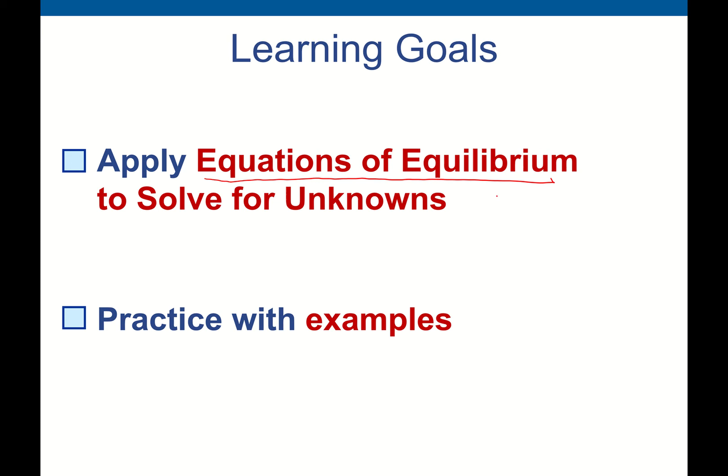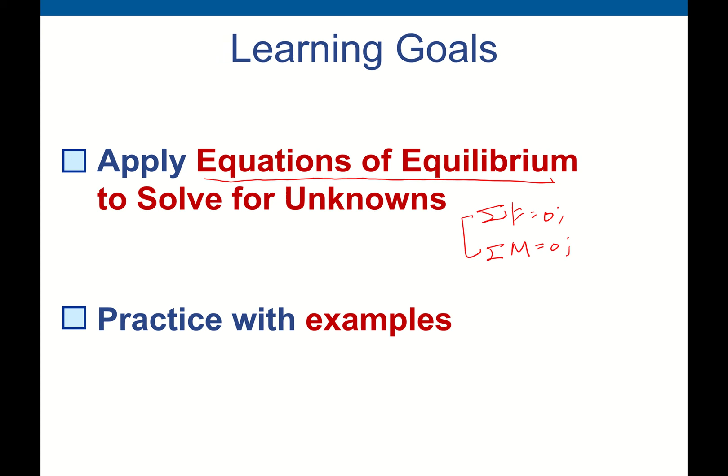So we have one learning goal today. Apply equations of equilibrium. So you may remember we learned this concept last class. Sigma F should be equal to 0. Sigma moment should be equal to 0. So these two things are the main equations we have to use.

In 2 dimensions, it's pretty easy, guys. Sigma Fx should be equal to 0. Sigma Fy should be equal to 0. That means there is no translation. This one means there is no rotation. So this is the rigid body. If this rigid body is stable, then these equations should be satisfied.

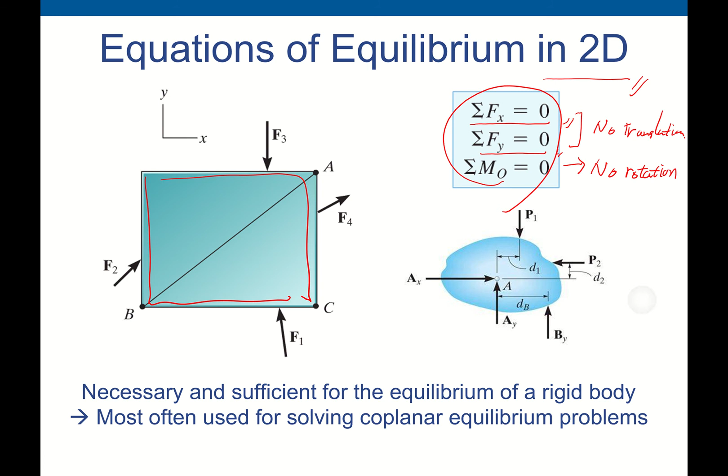Well, this is an interesting one. So if you look at this one, sigma Fx is equal to 0, and sigma moment A. Oh, okay. So we learned this one: horizontal forces should be equal to 0, the vertical forces should be equal to 0, and the moment at any point O should be equal to 0. How about these equations?

If the horizontal forces are all equal to 0, okay, no matter what the force Fy, if there are 2 points, point A and point B, if the moment at point A is equal to 0 and the moment at point B is equal to 0, then without satisfying the condition sigma Fy equal to 0, these three equations are good enough that the rigid body is stable.

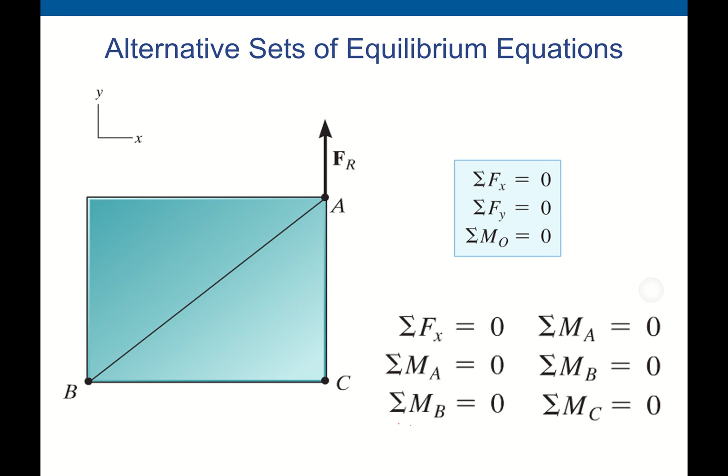When you solve the problem, please draw the free body diagrams. So there are several steps. The first step is to show the XY coordinate axes. You know this. So this is the positive x-axis direction and this is the positive y-axis direction. And the outline shape. Show all the forces and couple moments. Label all the loadings.

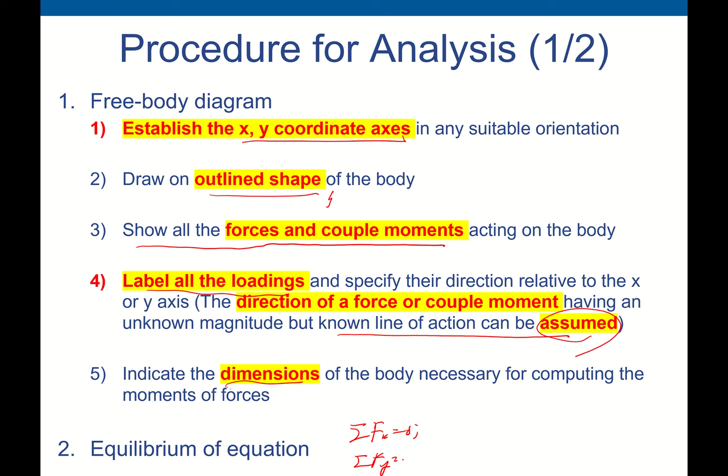And if you have unknown forces, then you have to assume the direction of the unknown forces. Indicate the dimensions. Then apply the equilibrium equations, which are sigma Fx equals 0 and sigma Fy equals 0. That's pretty much it. When you solve the problem, you may want to apply the moment equation first. You may see there are unknown variables, but if you solve the moment equation first, before Fx equals 0 and Fy equals 0, then in some cases you can easily find the unknown forces.

You can change the orientation if you want. For example, this is the horizontal force x, positive axis, right-hand direction, and the upward direction is positive y. But you can change it, it's really up to you. You can set the opposite way. This is positive x and positive y, or you can tilt these orientations. This is positive x and positive y. It's really up to you.

Whichever is useful to solve the problem. If you have a negative scalar, this is pretty important, guys. If you solve the problem and you got a negative value, what does it mean? That means your assumption on the direction was wrong. So you have to change the direction to the opposite direction.

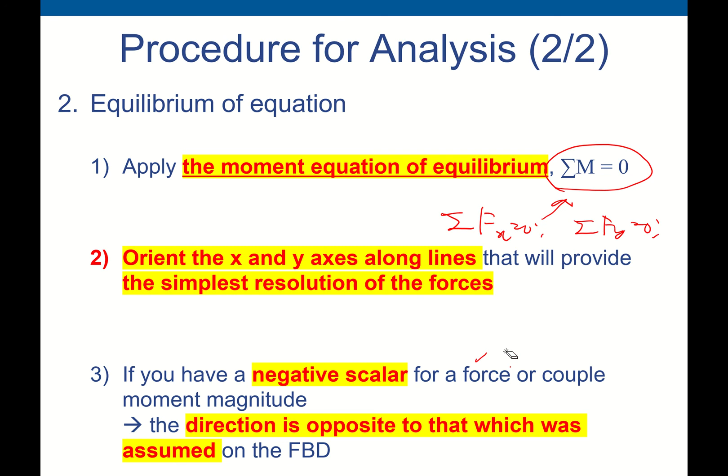So for example, we have unknown force B, but after you finish solving the problem, you got a negative value. Oh, B is negative 100 Newton. What does it mean? That means the direction is opposite and this is 100 Newton. All right. So this is important. We will see some cases during the examples.

So question: determine the horizontal and vertical components of reactions. Do you remember the support reactions that we learned last class? Because if you look here, point A and point B are supported by, this is a rocker, and this is pin jointed. How many unknown forces are associated at the pin joint, guys?

If you look at the pin joint, there are restrictions for the vertical direction as well as the horizontal direction. How about the rocker case? Rocker has only one support, for the y direction. There is no restriction for the horizontal direction for the rocker, but for the pin, we have to think about the horizontal unknown support reaction. Okay.

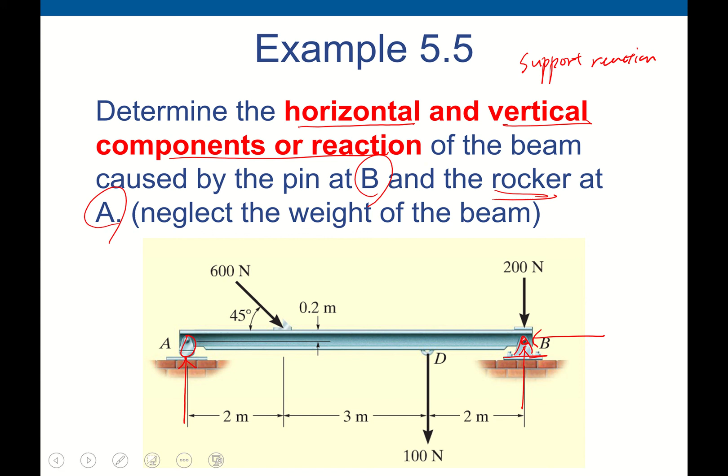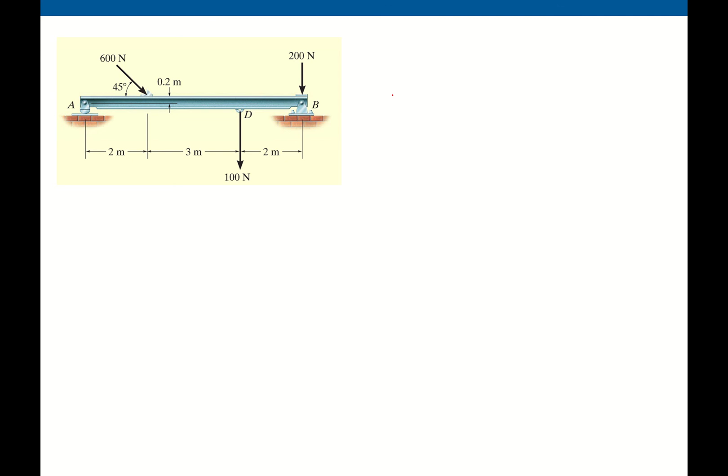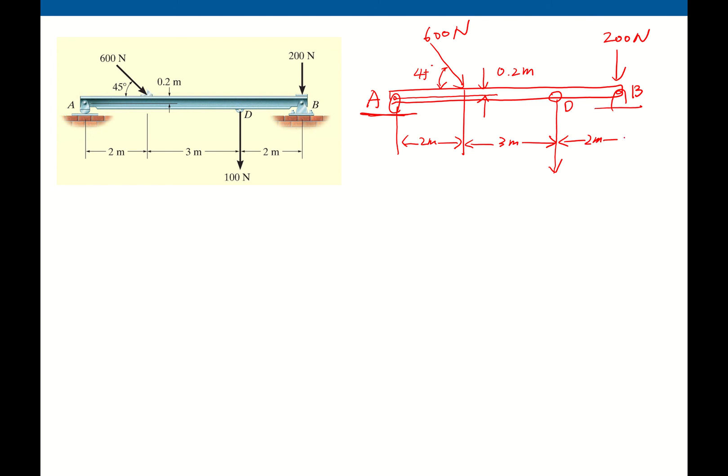So let's find the reactions. Like I said, we have to draw the free body diagram first. My drawing is not so great, please understand. B, A. There is a D. Okay, let me change the color here.

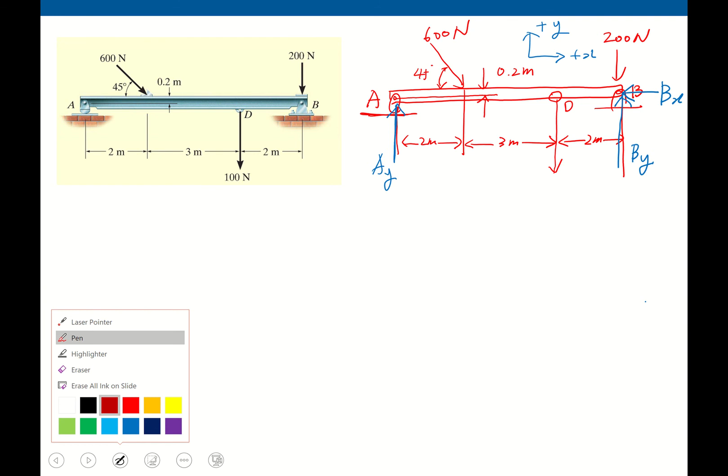Like I said, there is only one support reaction for A because this is a rocker. At the pin joint, we have two unknown support reactions. Let's say this is BY, and we don't know the direction, but let's say this is BX. Right is positive X and up is positive Y. And this is 100 Newton. That's it.

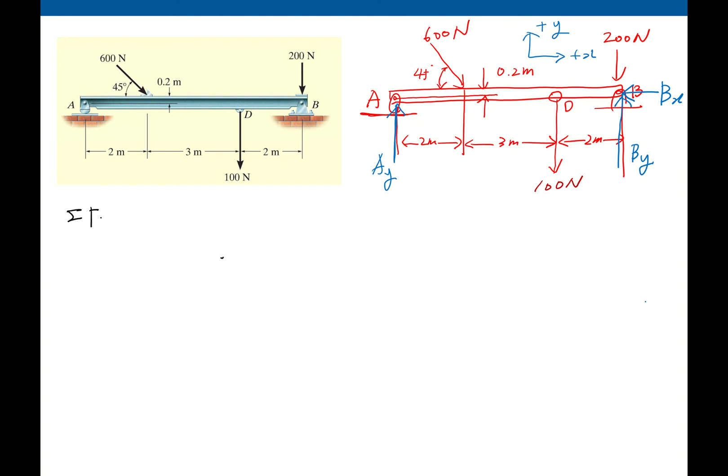Let's apply the equilibrium equations. Sigma Fx equals 0, sigma Fy equals 0, sigma moment about any point O equals 0. For the x-axis, what are the components? We have Bx, which is negative. How about this 600 Newton? This is 45 degrees, so you can decompose it.

This one is 600 times cosine 45, and that's it. This is a pretty easy case. This equals 0. How about the y component? Here we have Ay and negative 600 sine 45, and other external forces, negative 100 Newton, minus 200 Newton, plus By, and this should equal 0.

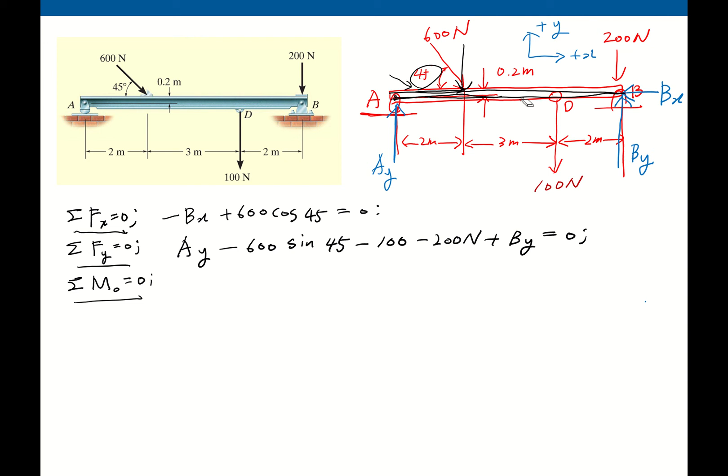The sum of all the moments should equal 0. Let's choose point A, because we have unknown forces at point A, so we don't need to consider Ay for the moment at A. As well, Bx does not affect the moment because they are collinear. Let me redraw. So choosing point A makes our life much easier.

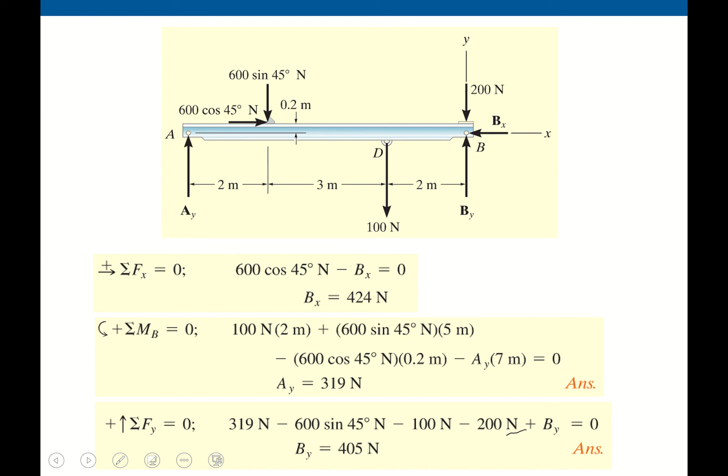For point A, these forces create clockwise rotation, and this one creates counterclockwise rotation. Clockwise is minus. So minus 600 cosine 45, the horizontal force, times the distance 0.2 meter. Another one is minus 600 sine 45 times the perpendicular distance, in this case 2 meters.

Another clockwise rotation, 100 Newton times 5 meters. Another one, minus 200 times 7 meters. And the last one, a counterclockwise rotation, By times 7. This should equal 0.